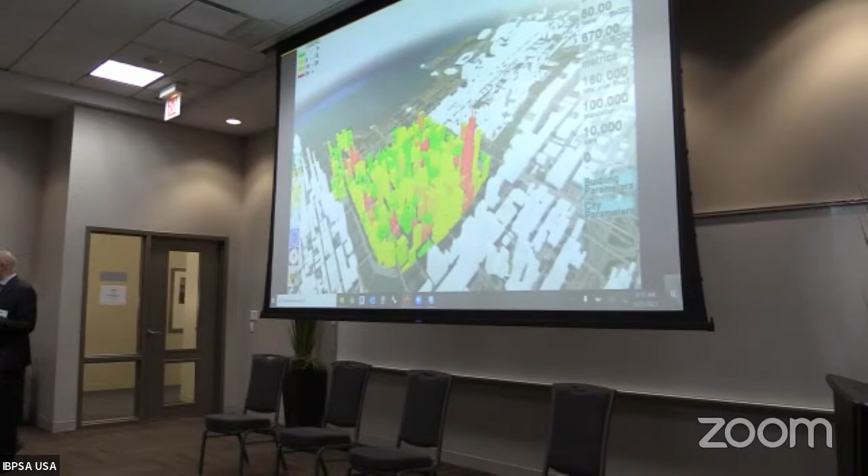So what we were focused on at the time was looking at scenarios that we could run for different buildings in the city. What we're focused on now, I'll show you this at the end, is looking at different scenarios for infrastructure. We actually believe there's a great connection between buildings and infrastructure. We actually see the buildings as infrastructure when we're doing master planning and designing cities.

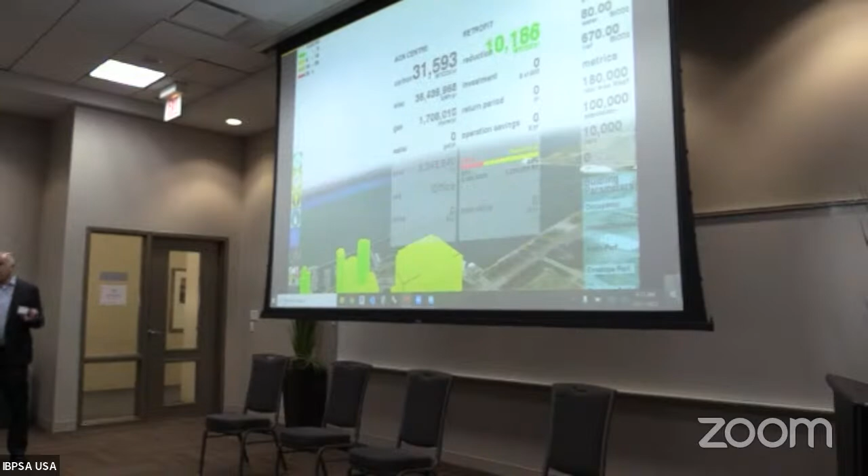At the time, we were looking at leveraging the existing building stock. Everybody knows the existing building stock is a key component of reducing carbon footprint. We actually have a challenge right now in our city with our core and existing building stock, and picking the way that's being utilized and used. And what we don't want are stranded assets. So we have stranded assets in our infrastructure right now as it relates to existing building stock because it's underutilized. So what we need to do is give that existing building stock an injection and figure out how to get it moving. From a carbon standpoint, that's critical.

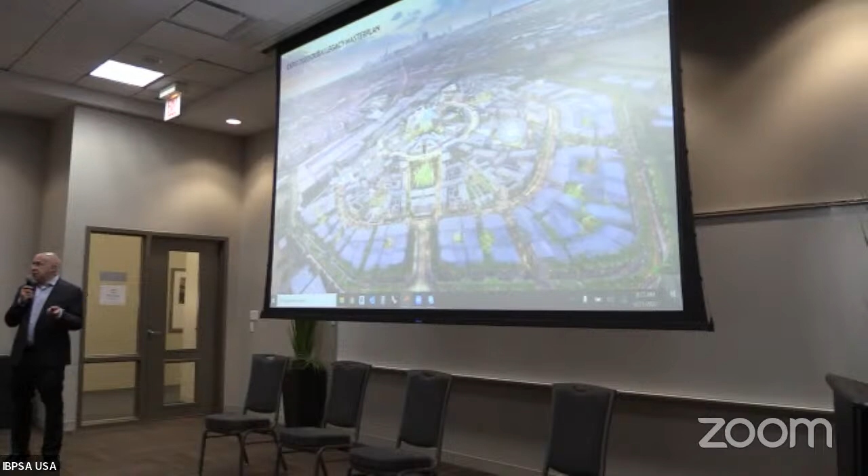We took that effort 15 years ago, and this latest master plan was actually provided for the World Expo that ran for the last 6 months and recently wrapped itself up. We did the legacy plan for the expo and wrote all the sustainable standards for it. We wrote all the master planning guidelines for the expo, and we were invited to do the centerpiece of the expo, which I'll show you today.

This was a very interesting approach for Dubai, because there are no buildings in this master plan that are over 11 stories. So although this is dense, it's low.

We are now in a position where we're looking at creating a walkable city. And for those of you who might remember Masdar in Abu Dhabi, which didn't really go the way they wanted it to go, which we explained way back when in terms of walkability - if the master plan isn't supporting the building stock, and the master plan and the vision for the infrastructure is not actually supporting the carbon footprint, there's no architecture rule you can build that's going to overcome that. You're digging yourself out of a hole constantly.

What we were able to do here was actually reverse engineer the carbon footprint for the infrastructure. What do I mean by that? When we first got there, they were already on the way down the road with infrastructure. They asked us to take a look at it, and what we did was write standards for the architecture that, through its performance, actually required less infrastructure. So according to their numbers, we saved them $400 million in about 4 months of analysis, because they weren't considering the end use or life cycle use of the buildings as they were designing the infrastructure.

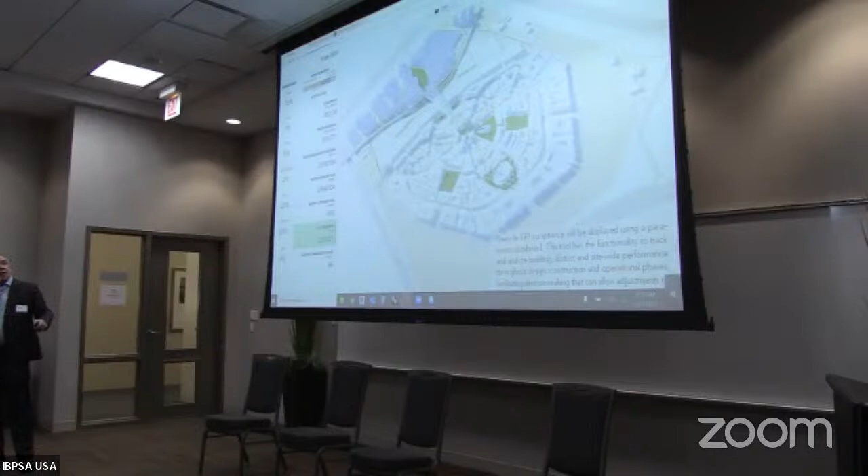We went on to do these 5 buildings and a centerpiece. There's some eye candy in here for the project. We won't spend too much time on this, but it's 3 office buildings, 2 hotels, and a central park. So the central space of this development will be a park that is now shaded by that large trellis that used to be there. That trellis is exactly the dimension from Dearborn to Clark - it's 130 meters. And I can tell you, I walked that space ad nauseum for 5 years, figuring out the scale of this thing. It is an immersive space, so it's a kind of fun technological experience.

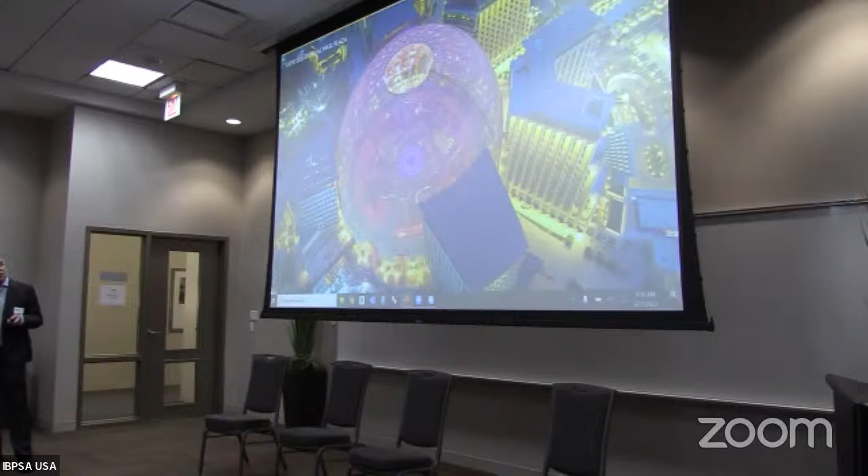It's the world's largest immersive space, and of course, it's in Dubai. The trellis itself creates its own microclimate for the park, making it usable in a much larger way than it would be in the desert at 120 degrees ambient temperature. The way we did this was to really understand the microclimates associated with this.

The reason I'm telling you all of this is not because we're proud of the project, but the key was really how to get the carbon footprint out of here and how to make the space usable. We had some pretty incredible successes with this as we unpacked the entire systems of the project and repacked it.

So these are some of the targets we were able to achieve. We're about 77% less energy than a typical Dubai building. We generate about 119% of our own electricity through photovoltaics. We took about 1,000 tons of CO2 out through the carbon analysis on an annual basis on this project.

I'll skip the next couple, but the one that really was key was the 73% less potable water. If you look at the billions of dollars being spent on desalination, we explained to them that if their entire district was doing this, and if every building did this, they could take that money spent on desalination and invest it in things like medical care, hospitals, and education that they need.

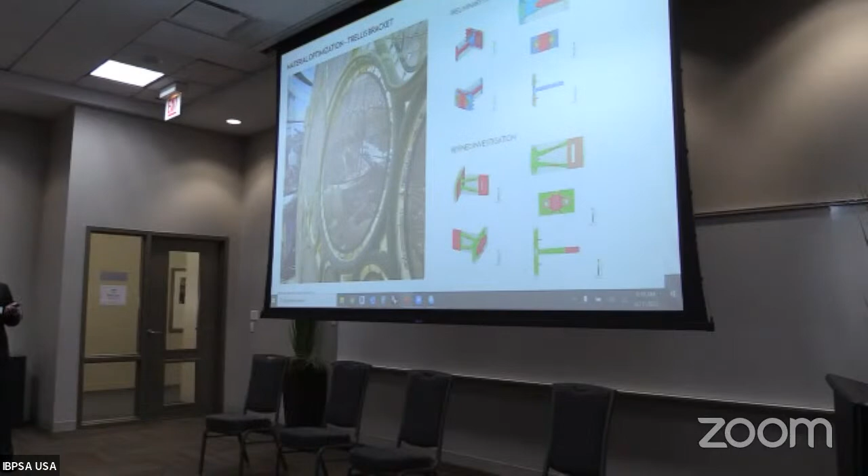As I mentioned, we're pretty rigorous and aggressive about the carbon stuff in the work in the office. We're down to the details on the carbon footprint and how we design the details of the buildings. And we hope at the end of the day that they end up being kind of fun and hopefully beautiful spaces for people to occupy.

We do this for every building that we engage. And over the years—15 years—we've grown up and graduated from energy to embodied carbon. And on the big guys, such as Wuhan Greenland Center, we have different strategies that we talk about to reduce energy.

This is actually a project a little bit earlier in the office than the Expo project, and it started off as a competition, which is important to note because it's a very compressed time period. So in this case, we're working very quickly on the conceptual nature of the tower as it relates to performance, culture, and context.

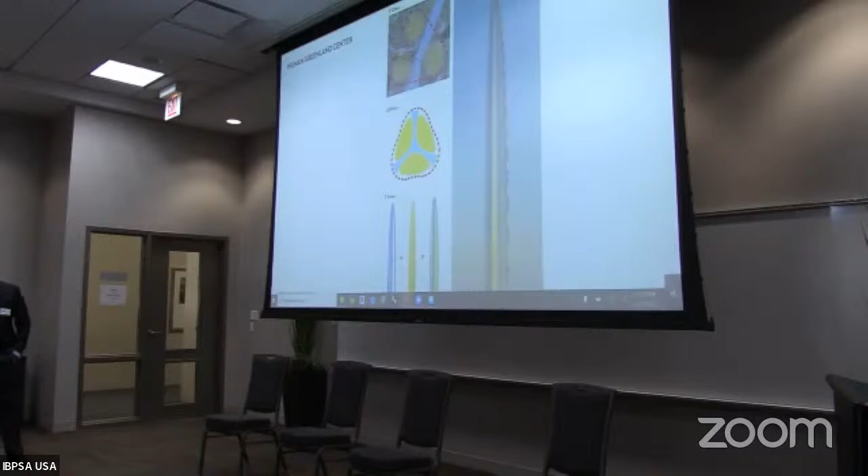And in those early decision-making processes, which is probably 5 or 6 weeks, we have to come up with very concise principles about how we could reduce embodied carbon in this case.

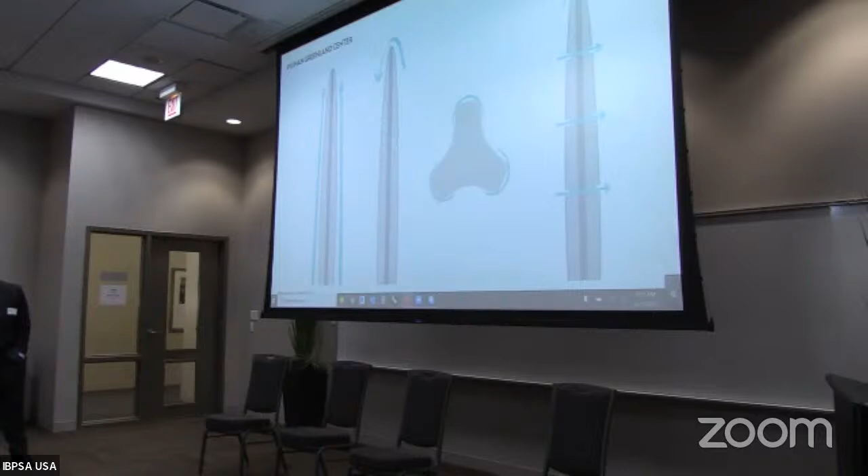So we said it's a tall tower. You have to do shaping to reduce the structural embodied carbon in the structural system. We do that with a variety of strategies. This is a strategy we developed in the competition, and it permeated through all the design iterations. An important note is that we collaborate very closely with structural engineers, and in this case wind engineering, to test those things.

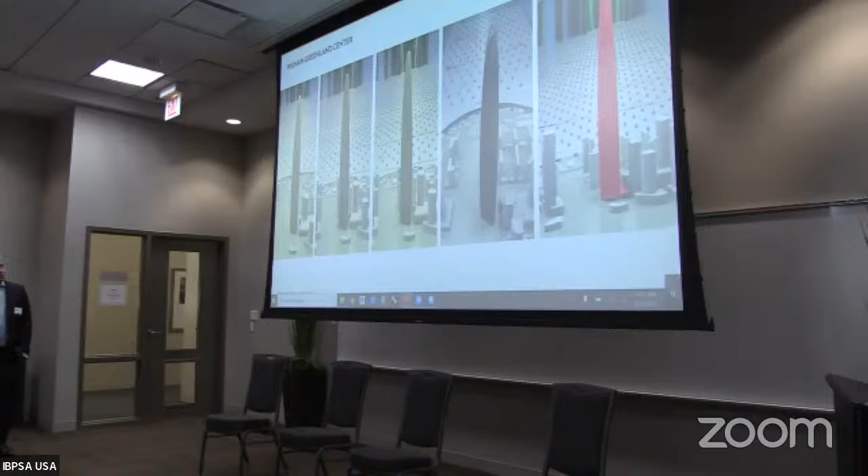This is 2012, and we're doing physical wind tunnel models to understand what the shaping of the building, openings in the building, tapering, and shaping of the top does to the efficiency of the structural system.

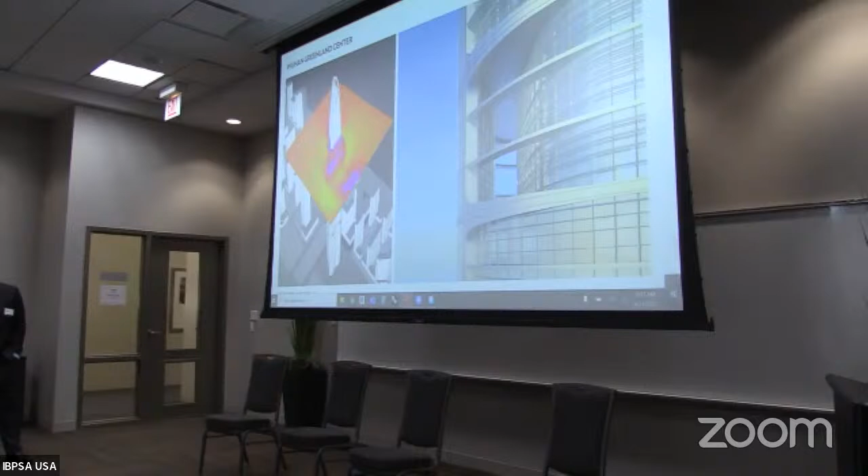That's at the macro level, from the overall building, but it's also in design features. This is just early CFD studies through one of these notches. When you're talking about the structural system saving a potential 15% of the total structural system—that's everything, rebar, structural steel, concrete—and when you put it to scale, the size of the workers next to the embedded steel in some of these columns, 15% is a huge amount of embodied carbon.

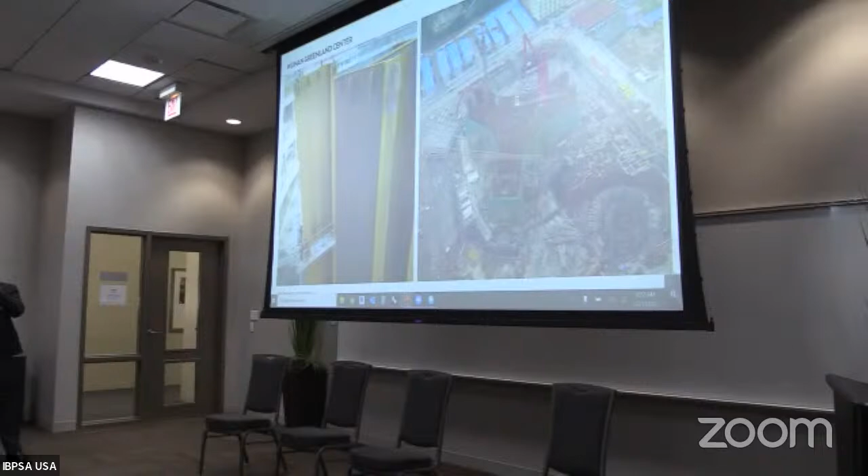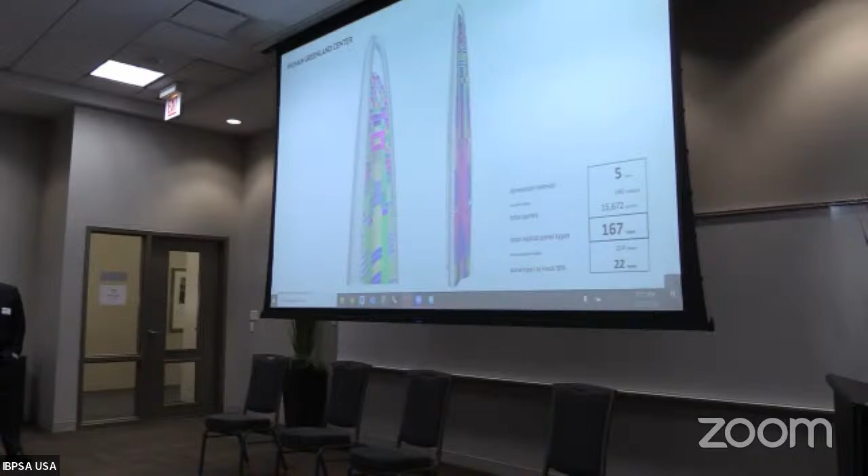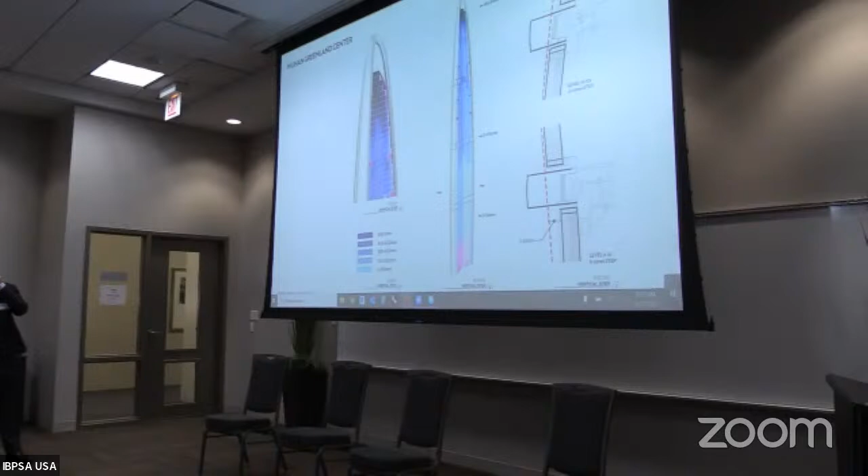It's important to note that we're doing this at the same time as we're designing the rest of the building. So in this case, as we're flexing the building for wind performance, we're also looking at fabrication, reducing the amount of unique panels to reduce waste in fabrication. We're also looking at details and the efficient way to do the detailing for the building, and also the complement of sustainability and evaluation of things like sun shading.

This is a detail of the construction, and this is a photo, the most recent photo of it being completed. Back to you.

I think also one of the conversations we want to have before we wrap it up is really about the process that we employ for all building types, all scales, master plans, material selection, as it relates to embodied carbon.

When Anthony talks about venting the buildings, which we did from Pearl River Tower 20 years ago, and the notion of creating stability or efficiency in the structure by reducing 50% or more of the actual infrastructure of the building—we're taking concrete and steel out of it, but we're taking cost out of it as well. The embodied carbon strategy we've signed up to do for some of these projects is pretty intense.

We took 5 years since we did the Decarb plan, and we're going to publish this book. It's being released now—it's called the Residency Study. We took 5 years and studied 9 different typologies of residential uses in this region, and I basically unpacked it for every possible aspect of the buildings and its use.

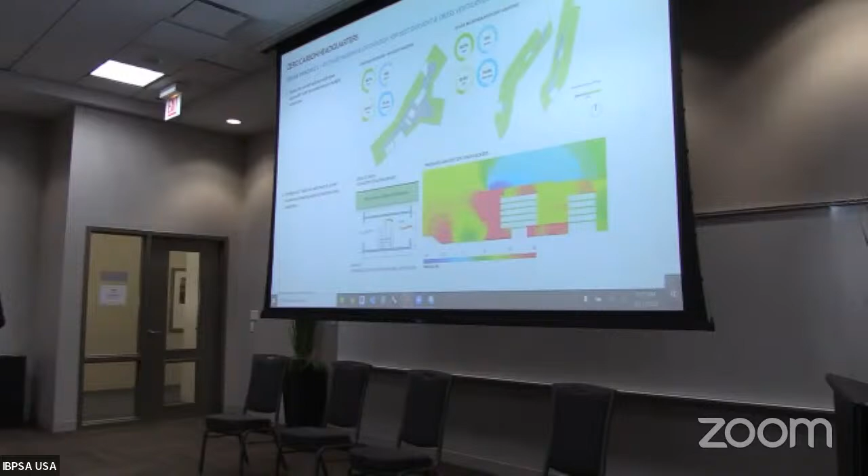So when we asked the question about what is an office building of the future, we had a lot of discussion about that. All of the analysis we did in the office just up the street here on the road. And we took about 4 months to walk them through what we think we could achieve for them. You want to talk about some of the analysis, the lights, or?

Sure, yeah. One thing about what Gordon was saying is that all of the targets and KPIs that we set were actually done as a carbon study before we even started designing the building.

So when we started to look at building stock, we said, okay, if our target is that we have to have daylit spaces, we really have to design all of the spaces. How would we design buildings that would respond to that? And in this case, designing the spaces not only for the width and depth of the lease span, but also for the opacity, or window-to-wall ratio.

It affected daylight in the space and glare, and it really narrowed down design choices between how the window would be broken up, and also how shading elements would even need to be implemented or not. And that analysis stretched to...

Using analysis to understand how much PV power we're going to be able to produce on site. One of the things we were tracking in the daylight studies and lease span studies was operational carbon, and it was easy for us to come up with a budget saying this is how much operational carbon or EUI we're going to use, and then we had a budget to say this is how much energy we needed to produce, and we needed to do that analysis.

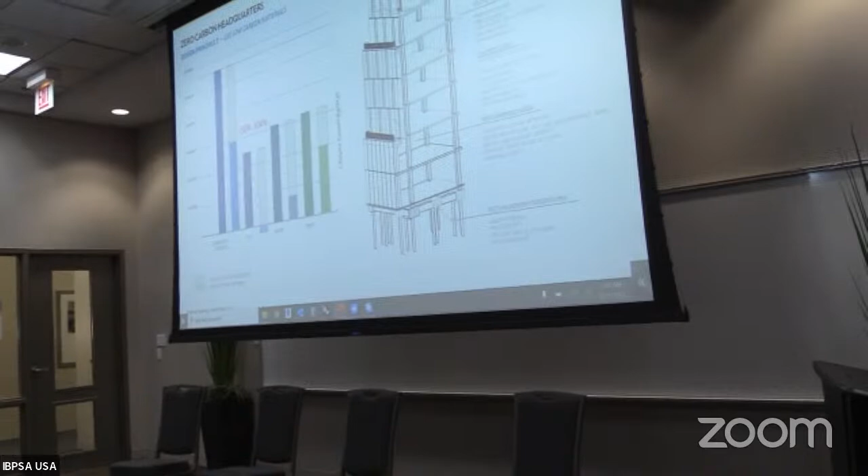There's the analyses that we ran, and the punchline is that we can get to net zero carbon in 7.9 years—that's the payback. So when we showed this to them with a concrete building, they couldn't believe it, because obviously from a cost standpoint, this was going to make a ton of sense for them.

Not everybody has access to a forest. We were all around the world. No one in Dubai is going to go cut down, retroactively cut down a forest to build a place. It's not going to happen. It's a lovely idea, but it's not going to work. Concrete, as you know, is everywhere.

And when we talk about materials, we're not just talking about buildings. Yes, we're architects, but for those of you who are infrastructure engineers and designers, talk to us about the roads, the sewers, the drainage systems. You're going to do those out of wood? I don't think so. What are we really trying to say?

So the message we want to review is, let's just take a deeper look, think about a global strategy, really look at the common sense solutions around us, and let's design for it. It's absolutely achievable from our perspective.

The only thing I'll add is that what this process and what the board is talking about is designing efficiency first. That's through the design process, that's performance embedded in the design process. And then that's embodied. And then we can also, working with engineers, reduce our operational impact. So now we're doing the next step of doing the least bad.

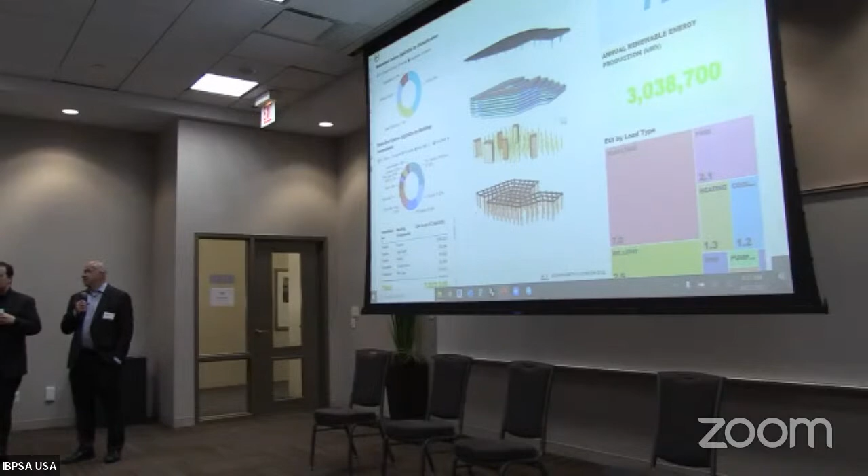Okay, if we were in the mayor's position, what are some of the steps that we would be taking to look at the core of the city?

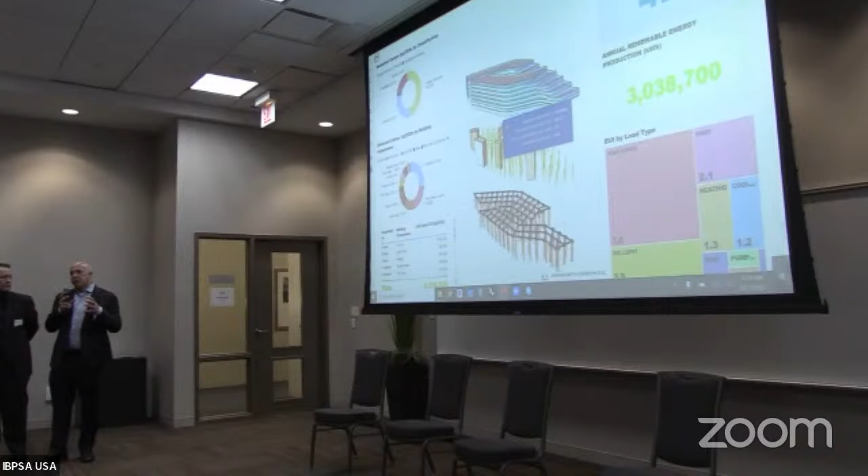Frankly, I think we have to address the core. I think we have, from a population standpoint, seen a departure from the inner core of the city, which we know from our 2007 work represents about 10% of the carbon footprint in the density of the core. I'm talking about the core as defined by the river.

The equation around carbon, as I mentioned, is also economic. So we need to put those buildings back into use. We need to make sure that we're not left with an asset of infrastructure that's underutilized.

Sometimes we do presentations where we talk about the cities that we've designed and built, and all of it as the barrier reefs of our built environment. And these areas have their own ecosystem: a financial ecosystem, a social ecosystem, a political ecosystem, and a carbon ecosystem.

So my goal would be to go after the problems from a carbon footprint standpoint, go after the lives of those buildings and get them reused one way or another.

We would like to repurpose and adaptively use the core, and I think that's absolutely feasible. In fact, given the way programming and approach to public open space and the kind of injection of technology into these buildings today, we could absolutely get a high charge, functional, fantastic city that's mutually supportive of all aspects of life that is carbon friendly. That's where I started.